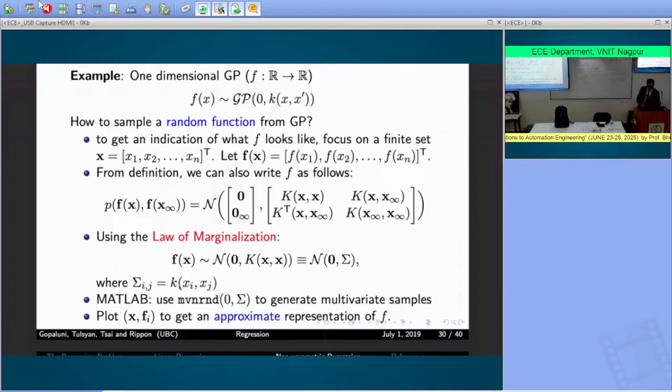The k is called the kernel function. It's basically the covariance between x and every other data point in your data. Okay. Some of these are probably not obvious or not clearly presented there.

Gaussian processes. So when you have a regression problem, you want to map finite training samples to your function that predicts all possible inputs. So that's your data, that's the model. Given x star, you want to estimate y star. And I already showed you how to learn the linear and nonlinear regression problems. You can also do the same with Gaussian process regression, where the goal is to find the mean function and the covariance function. Okay, using the data.

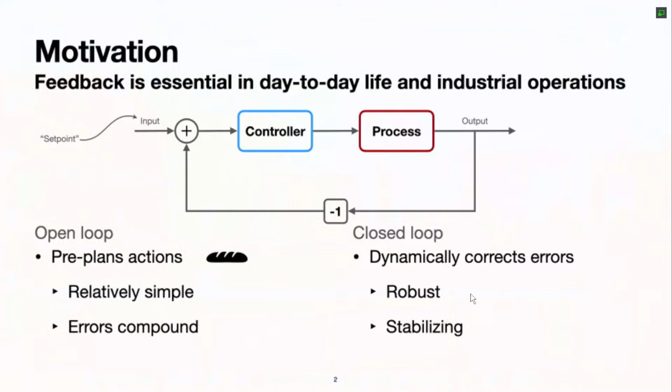So that's where feedback comes into play. If you add feedback and a controller, you can online dynamically correct errors. Therefore, this approach is going to be robust and stabilizing. Okay, so this is a little bit of background on control. The problem is feedback loops often underperform. If you just have one control loop, it's manageable. You can build a model, synthesize a controller, validate it, and then install it on a real industrial process.

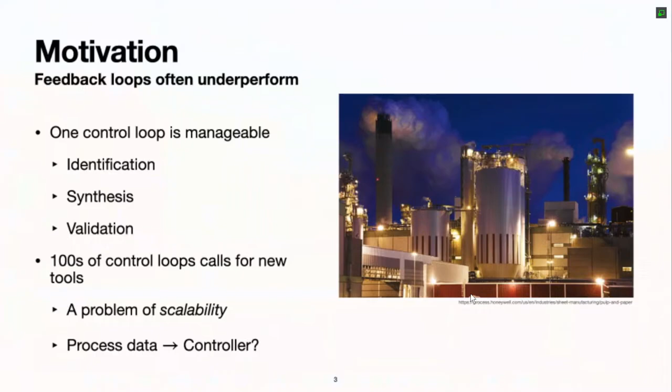But what if you have hundreds of control loops? How do you scale your algorithm? How do you go from process data to controller? That's not clear. So we have used reinforcement learning in the context of replacing these traditional industrial controllers. So what I'm going to do is explain to you how we've used reinforcement learning in this context, and also tell you about how reinforcement learning works, how the algorithms are built, etc.

So I think nearly 7 years ago, I went to Honeywell and I told them we can replace their controllers with reinforcement learning agents. What you see on the left-hand side is what typically happens in industries right now. So you have some environment, some process at the top, and then there is a controller, it's a PID or a model predictive controller or some other controller. And then you have operators and engineers who are constantly monitoring these controllers so that their performance is maintained on a continuous basis.

So I went to Honeywell and I told them, okay, look, we have these nice, cool algorithms, deep neural networks and reinforcement learning. We're going to replace all your controllers with reinforcement learning and deep neural networks. And they said, we've already invested millions of dollars in our existing infrastructure. There's software, so we don't want to change our existing infrastructure.

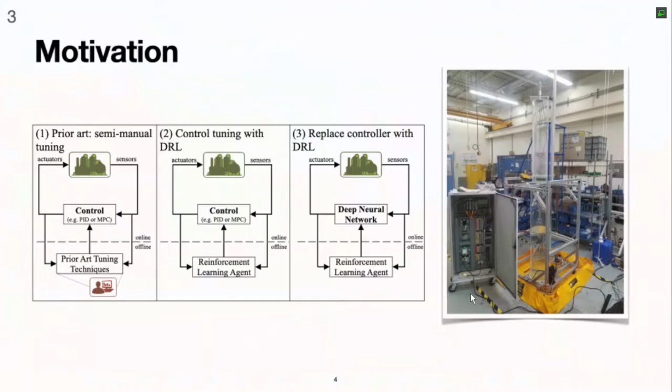Then we came up with this alternate idea of just replacing the human in the loop with a reinforcement learning agent, which oversees the performance of existing controllers. What you see on the right-hand side is a pilot scale facility that Honeywell built for us to test some of these algorithms. Okay, so the question we asked was, can reinforcement learning help maintain these control loops? Okay, the answer, it turns out, is not very straightforward.

If you have reinforcement learning, you can leverage observed data to improve the operations. With reinforcement learning, you don't need any prior knowledge. It'll still work. You can minimize prior domain knowledge. And you can also build this automated agent that will maintain your controllers without any or much human intervention.

But the challenges are there is additional algorithmic complexity. Industries already have auto-tuners. And stability during and after training is very important. In addition to that, sample efficiency of these algorithms is very important. So our goal was to balance the automation and scalability of reinforcement learning using control theoretic tools to create efficient and safe improvements. Okay. So that's the context in which I'm going to explain reinforcement learning. We're using reinforcement learning as a tool that could potentially eventually replace traditional control systems.

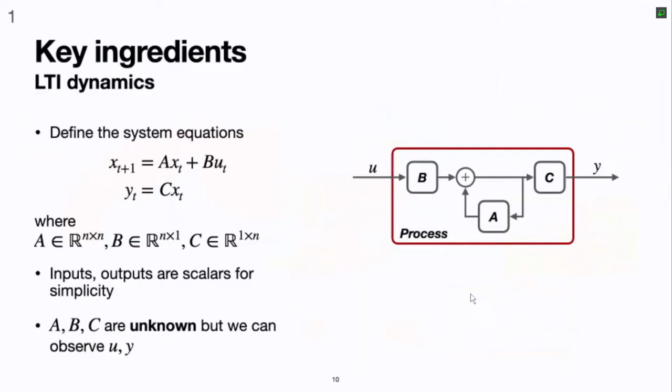You've probably heard of impulse response, right? So if you have a state space model, then the impulse response from X is given by x0. You start at x0, x0 equals 0, y0 equals 0, and then you have x1, x2. You can use those recursive equations to find the value of x, the impulse response, at different time instants.

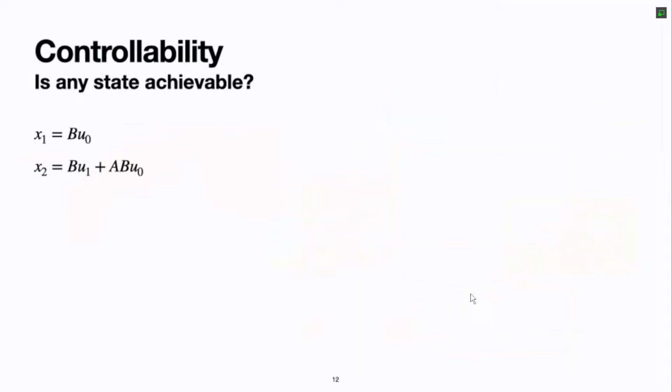The idea behind controllability is if I give you two states, x1 and x2, can you always find a sequence of inputs u that take you from x1 to x2? If you can, then your system is controllable. It turns out that this matrix here, C, that is made of the system matrices A and B, if that matrix has full rank n, then your system is controllable.

If that matrix does not have full rank, then you cannot take your system from one arbitrary state to another arbitrary state with a unique sequence of inputs. That's not possible. So controllability is a very important concept. Unless you have controllability with your system, you cannot get the behavior you're hoping for.

And a dual concept to controllability is observability. If I give you the inputs U and the outputs Y, can you find the entire state sequence, X? X's are states, they are hidden, they're not measured. So the question is, if I give you Y and U, can you recover a unique X, the underlying states? If you can, then you have a system that is observable.

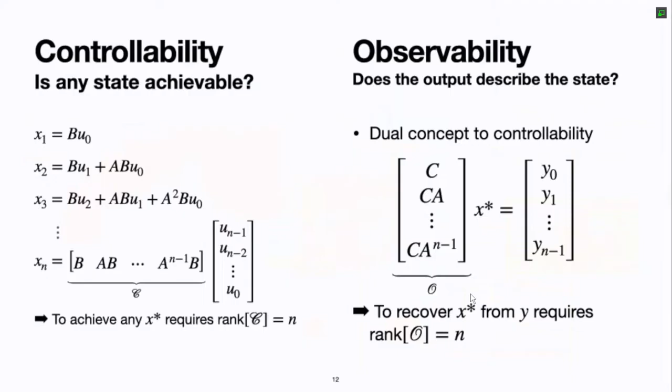And this matrix here, again formed using the model matrices C and A, is called the observability matrix. And one way to check if your system is observable or not is to look at the rank of this matrix. And if the rank of this matrix is full, if it's N, then you have an observable system. Okay, so these are two important concepts in control theory: controllability and observability.

Now you will recall that the impulse response is given by that expression there. It's the product of C times A to the power of n minus 1 times B. Then you can multiply the observability matrix with the controllability matrix to get this, what is called a Hankel matrix. And you notice that each row here essentially has the impulse response coefficients.

Okay, those are the same. Those are the same impulse response coefficients. But if you take any row, you have the entire set of impulse response coefficients. So the product of observability and controllability matrices will give you this Hankel matrix. And I'm going to use this Hankel matrix to do something cool. So let me take a step back here and explain what I'm trying to do.

So I'm going to get to reinforcement learning. But in order to do reinforcement learning, I want to build a model from data, okay? And I don't want to use parametric models. I just want a data-based model that's not parametric. And to do that, I'm going to use something called Willems' fundamental lemma.

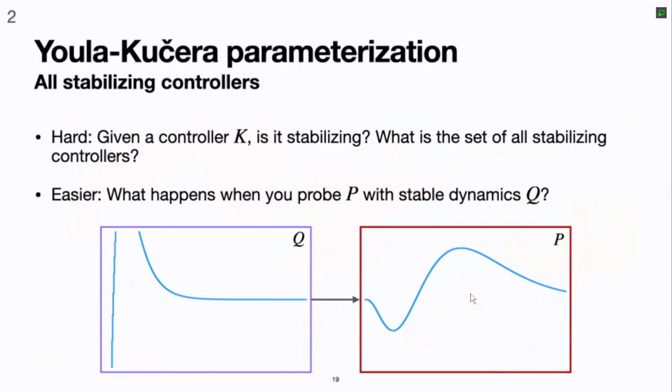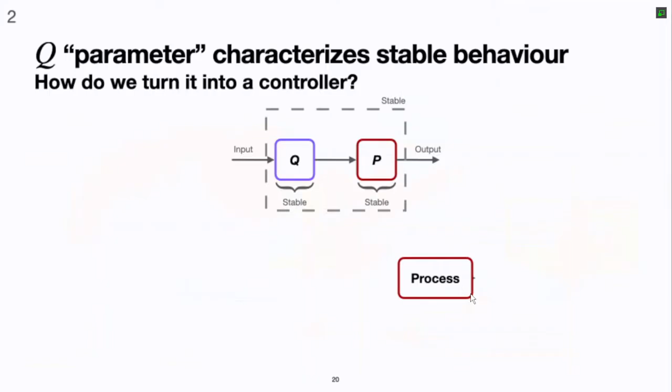And this idea is used in parameterizing all stable controllers using Youla-Kucera parameterization. Okay, so if you have a P that's stable, Q that's also stable, then what you can do is the following.

Oops. Sorry, there's too much animation here. All right.

So if this is stable, any Q in front of it will also be stable. So you can use that idea to characterize all stable controllers. Okay, so these two are equivalent. Here, if you look at this, you're taking this output and you're subtracting it from the controller, and inside the controller, you're adding the output of P, right? So you add and subtract, it's the same thing, so you get that. So this is a different way of showing the same thing.

And now you have this controller, and this whole thing is going to be stable as long as you pick a Q that is stable. In that way, we have characterized all controllers that are going to be stable as long as your Q is stable.

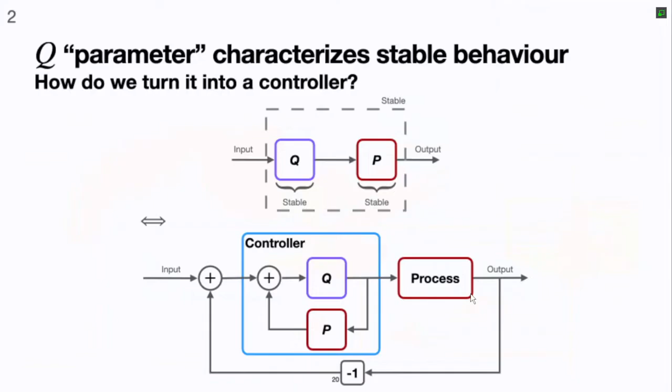Okay, so far I've told you there's this Willems lemma that gives you a model. Then I've also explained how you can characterize all stabilizing controllers. The last ingredient to what we're trying to do here is reinforcement learning. Okay, and I'm going to spend a little bit of time here to explain how reinforcement learning works. You have the environment or the process. Okay, the process generates some states, s t plus 1.

In reinforcement learning, we use S. In control, we use X. They are the same states. Okay, so in control literature, typically you'll see people using X to denote state. In reinforcement learning, you'll see them using S to denote state. Okay, so the environment generates a state, and we also use the measurements from the environment to define a reward. Okay, a reward is your R.

And the state and the reward value are given to the agent. We'll talk about what's in the agent in just a moment. The agent then determines what action it's going to take on the environment. And the way the agent is going to decide the action is through something called policy. It's policy pi. So pi is the policy. Policy in the control language is the control algorithm. It's the same as, or it's similar to, the control algorithm.

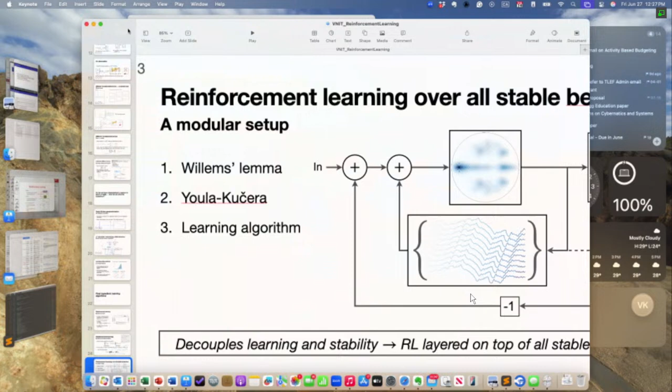Okay, so that is reinforcement learning. Willems' lemma gives you the model here, the stable model. The Youla-Kucera parameterization Q makes sure that the closed loop is stable, and then we use the learning algorithm to control the overall process. Okay.

So this approach is something that we came up with. Some of these ideas are patented. We try to decouple learning and stability. RL is layered on top of all the stable behavior. Reinforcement learning is really tuning this Q, the controller, or Youla-Kucera parameter.

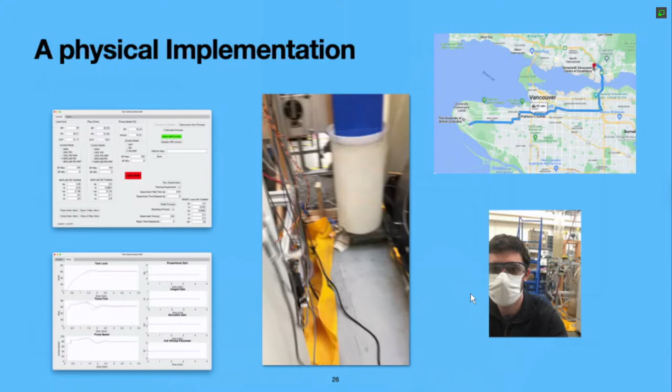Okay, there's some examples here. I think I'd briefly shown this earlier, but I'll explain what this is. That was my student, Nathan Lawrence. He's now a postdoc at Berkeley. Vancouver, University of British Columbia is on that corner. He used to drive to Honeywell in North Vancouver.

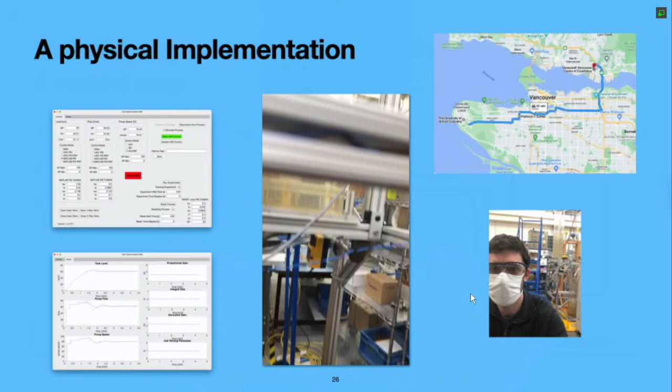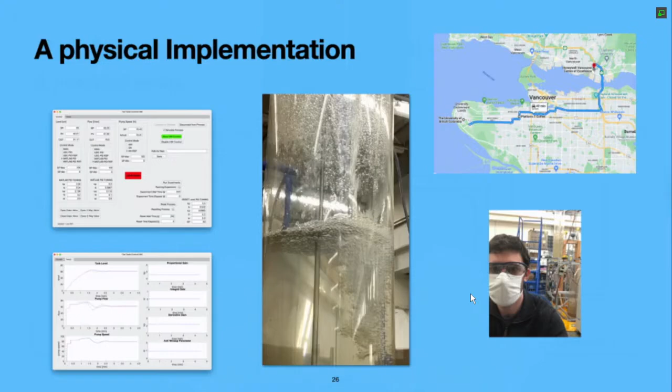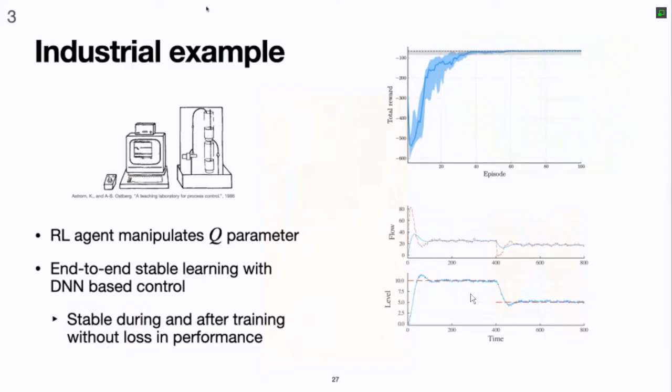This is a pilot scale plant that they designed and built for us. He was controlling this plant using the algorithms that I mentioned, not exactly the same algorithms, but different variants of those algorithms. Honeywell also developed an interface for us to interact with this tank. Okay. I believe this data is from that experiment. You can see the set point changes and the tracking performance of the RL agent.

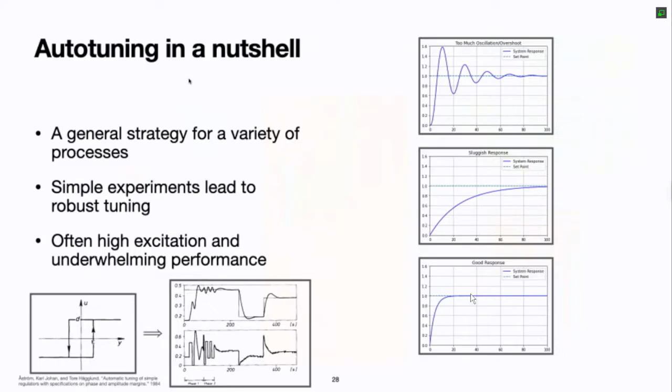He compared the reinforcement learning algorithm that he developed with a wide range of other algorithms that are in the market. SIMC is an algorithm by Sigurd Skogestad at NTNU. So we compared deep reinforcement learning with different performance metrics against AccuTune 3, which is a Honeywell controller, and SIMC, Skogestad's IMC controller. Our algorithm worked better with certain metrics, but the challenge was it just took too much time, right? So if it takes 50 minutes when a Honeywell auto tuner can do that in 5 minutes, it's not very helpful.

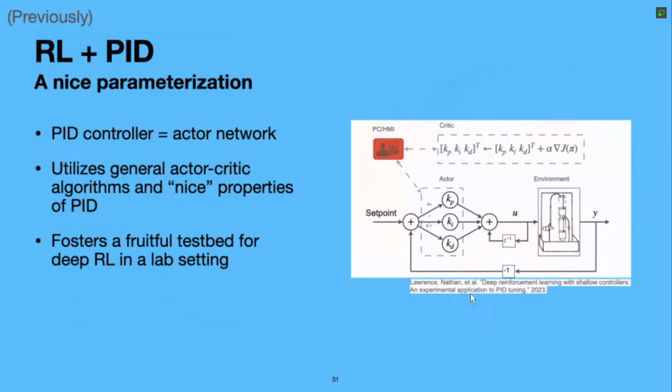Okay, RL plus PID. We have also used reinforcement learning to tune PID controllers. So I'll skip that, and I'll just explain a couple of other things using what is called meta reinforcement learning.

Surendra and I have to leave at 12:45, but I'll give you the advanced learning Python notebook. You can spend 15, 20 minutes on that. It doesn't have, unfortunately, code for reinforcement learning. You can get it online. There are lots of controllers. As I mentioned yesterday, OpenAI Gym. So if you have time today, I don't have this code, but I'm sure you're smart enough to ask Gemini to build it.

If you go to OpenAI Gym, there is a lunar lander. It's a vehicle that's supposed to land on the moon. That's the simulator, that's the environment. In OpenAI Gym, you'll find a lot of open source environments. The lunar lander is one of those environments. Take lunar lander and use reinforcement learning to land it. On the moon, they have 2 flags. Your goal is to land that lunar lander between those 2 flags. You'll find code online for reinforcement learning. You can probably use that and figure out how to land it between the 2 flags.

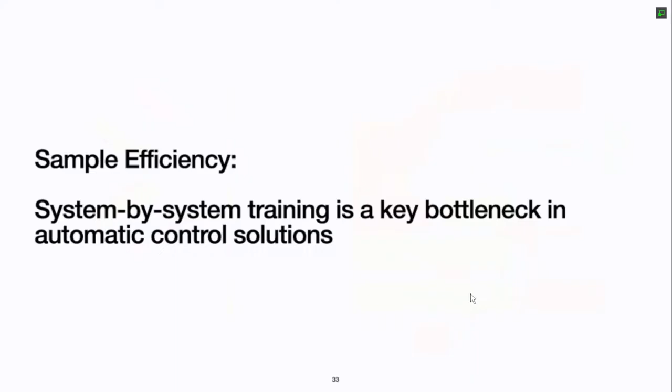So the last topic of interest for us when we were working with reinforcement learning was sample efficiency. As I mentioned, if Honeywell auto tuners are tuning controllers in 5 minutes, and my reinforcement learning algorithm takes 50 minutes, that's not going to be competitive. So we wanted to figure out how to improve the sample efficiency of reinforcement learning. And to do that, we use a tool called meta reinforcement learning.

I think I gave you the example of balance bikes on the first day. You remember? Yeah. So that's meta learning actually. So in meta reinforcement learning, you take your RL agent and train it offline on a wide range of environments. So let's say you think your true environment is a first order differential system. Then in simulations, you take a wide range of first order systems and you train your RL agent to work on all of them.

Your RL agent is trained on, say, 1 million offline systems. Anything you do offline is not expensive, because online, I mentioned how these iterations between agent and environment can cost you because you're perturbing the process, and that's cost, right? But offline, if you have a model, you can do those perturbations any number of times without incurring any cost.

So in meta-RL, what you do is you come up with a large number of models and train your agent to work on all of those models. And in the process of training it, your RL agent encodes the information about each of the environments that you've trained on using a hidden variable called Z. So Z is a hidden variable that in a way captures the information about each and every system that you have trained your RL on offline.

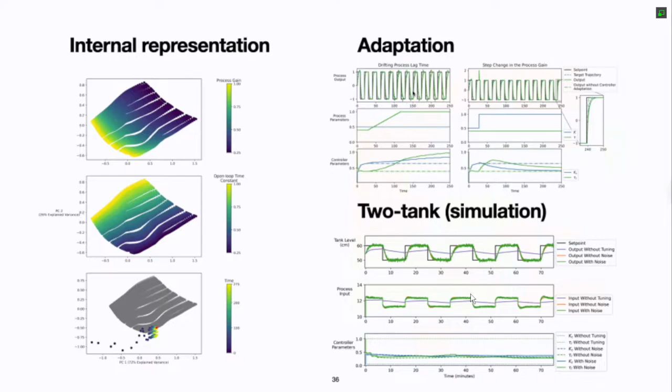So I'll show you some examples here. In the top right-hand corner, maybe I should zoom in. Let's see if I can zoom in. Right. The solid black line is the set point. The dotted green line is the output.

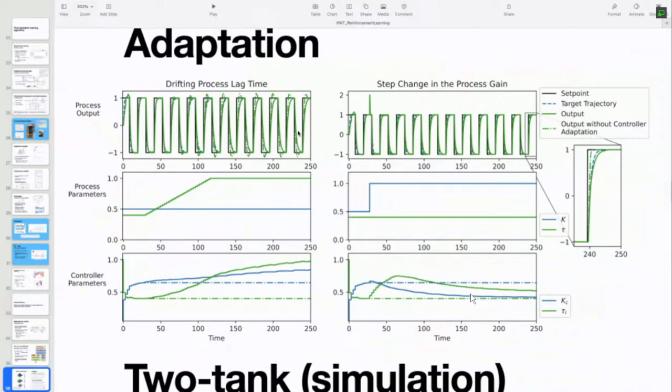Because this RL agent was trained offline on a wide range of systems, if your system changes, say your time constant or the gain changes and it's behaving differently, your RL algorithm can very quickly adapt. So that's the adaptation part. Somewhere over here we changed the system, and the RL agent very quickly learned and started controlling the new system.

This is another interesting example where the solid line shows the set point. The purple line is what a typical PID or other controllers that are not tuned would do when you change the system. The green line shows the response of our meta reinforcement learning algorithm. Even if you change the underlying system, it automatically learns what you have and starts adjusting its policies appropriately.

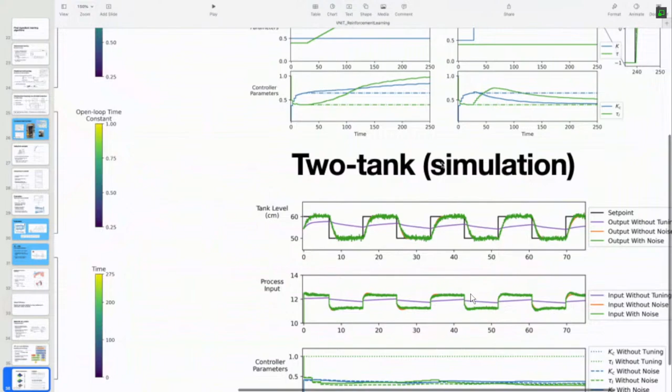I think I showed you some of these examples in my very first lecture. I apologize, I know I went through a little fast. There's a lot of material, but my hope is that you'll go away with some intuition into how these algorithms work. If you want the nitty-gritty mathematical details, you will have to spend many hours reading reinforcement learning. Hopefully you understand what reinforcement learning is at a high level, I've shown you some applications, and you've seen the parallels between control, which you may have studied in undergrad, and reinforcement learning.

Reinforcement learning is used in large language models as well. They use a variant called reinforcement learning from human feedback. It's widely used in robotics and a variety of other areas. It's a very popular tool for solving optimization and control problems under uncertainty. One of the main people behind reinforcement learning is Rich Sutton at the University of Alberta. He received the Turing Award 3 or 4 weeks ago, considered the Nobel Prize in computer science, for his work on reinforcement learning.